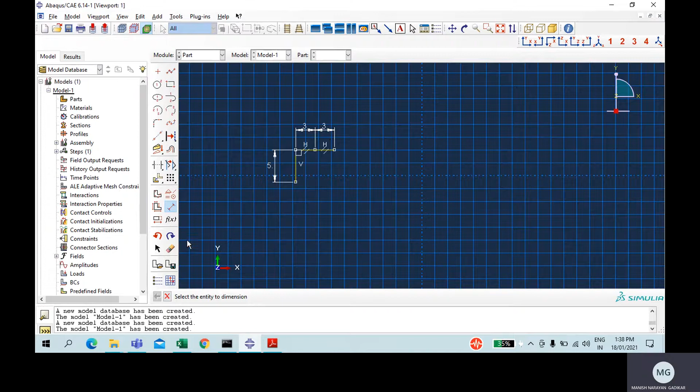This is 5 meter. This is 3 meter, and this is also 3 meter. So close it. Done. Now we have done with the wire element. We'll go for the property. We'll create material property. I can write it as steel here. I have to give general density. We know it, 7850. We have to give some mechanical property, elastic.

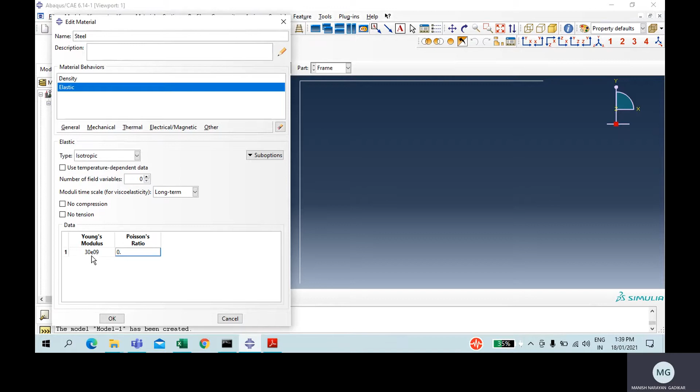We have to see what is Young's modulus in our problem. It's 30 GPa. So 30E09, and Poisson's ratio I'm considering as 0.3 for steel. Okay, now I have to create section. So I'm going with the beam section as the element is wire. I can write it as a beam. Continue. We have to create profile. So I'm selecting rectangular profile. Continue. I have to provide width and depth.

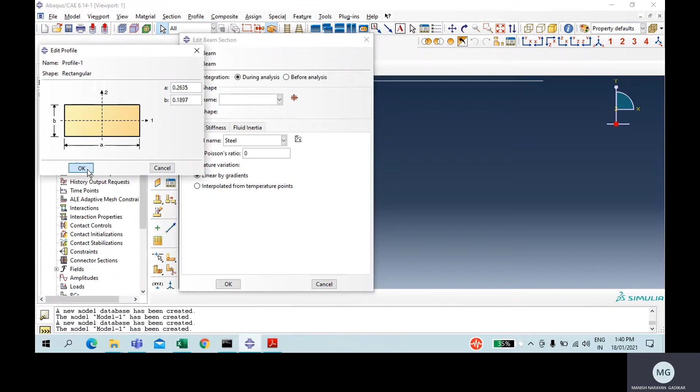So I've calculated these dimensions. It's coming width as 0.2635, and depth is 0.1897. Okay, we have done with the sections. Steel has already come. Now we have to assign the section to this element. We'll be selecting all 3 elements. Done. This beam has already come. Okay, assigning is done. I'll go for assembly.

We'll create instances. We'll create independent mesh instances. Okay, now we'll go for step. We'll create step as a dynamic explicit. Continue. Okay, and I'll go for loading. So firstly, I'm going for boundary conditions. So our boundary condition is fixed here and fixed here. So I'll be selecting this symmetry. I'll write it as fixed.

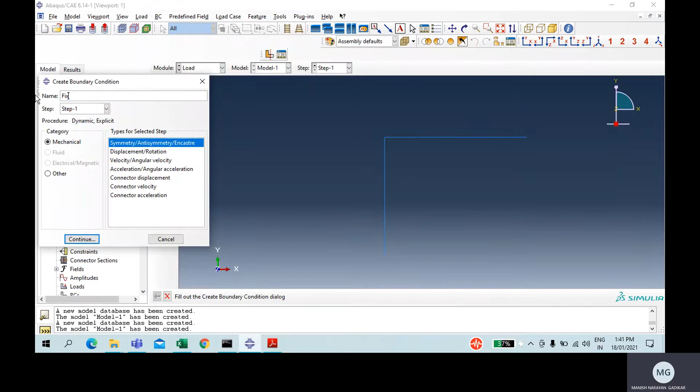Done. I'll select this node. We can select 2 nodes by using the shift button. Both are fixed. Done. We'll encastre it. Okay. Fixing is done. Now I have to go for the loading. UDL of 25 kN per meter in this direction. So I'll go for load. I'll apply line load. I'll select line load. Continue. I'll select this element. Done.

I have to apply it in this direction, in positive X direction. So its value is 25, so 25000 in terms of Newton. We have to apply it smoothly. So I'll go for smooth step. At 0 it is 0 and at 1 it is 1. Okay. We have to change it to amplitude. So line load is done.

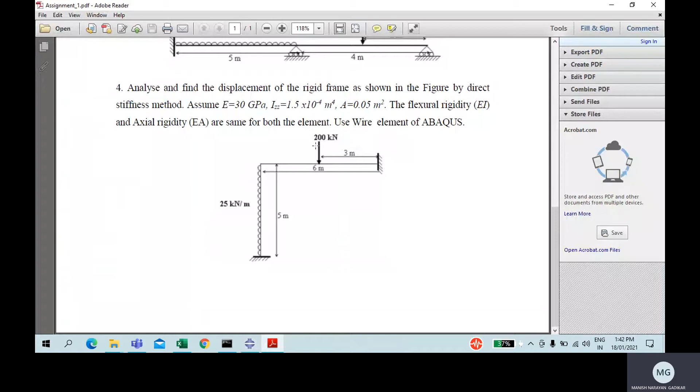Now I'll be going for this point load of 200 kilonewton. So I'll go for load again. I'll select concentrated load. To select this node. Done. So our magnitude is 200 kilonewton, in the minus y direction. So I'm giving minus 200 kilonewton. In terms of Newton, it will be 200000, with amplitude. Okay, so loading is done.

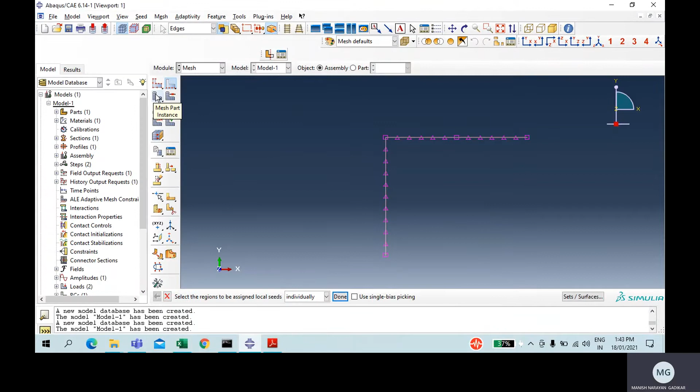Now I'll go for meshing. I'll select whole model. I'll seed it. I'm going with the 0.5 size. Okay. We have seeded. Now we have to go for mesh part instances. Okay. Meshing is done. Now I'll be going for job. I'll create a job for frame element. Okay. We'll submit it.

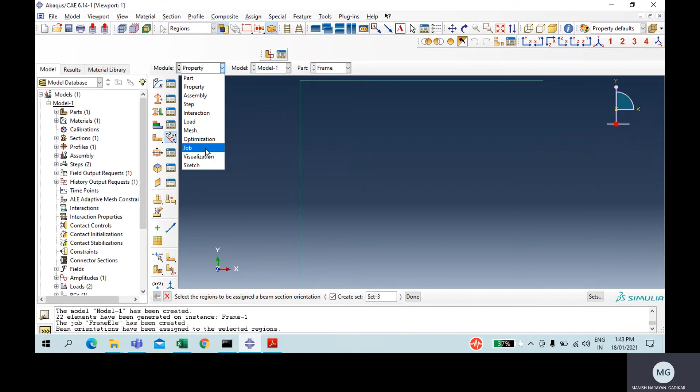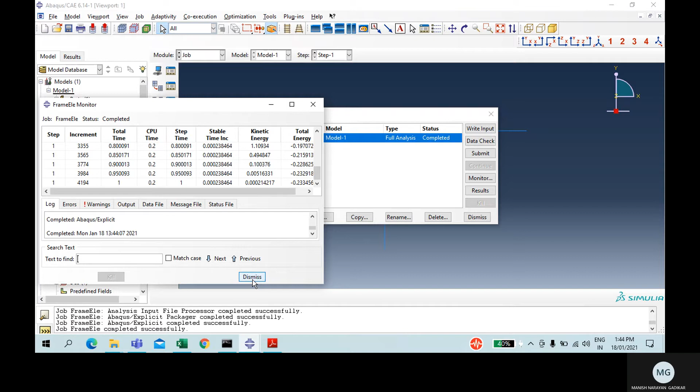We have to orientate it. I forgot to orientate it. So I have to give orientation. Beam section orientation. Done. Orientation is done. I will run that job. Submit. Have to wait. It's completed. Dismiss. We can check results.

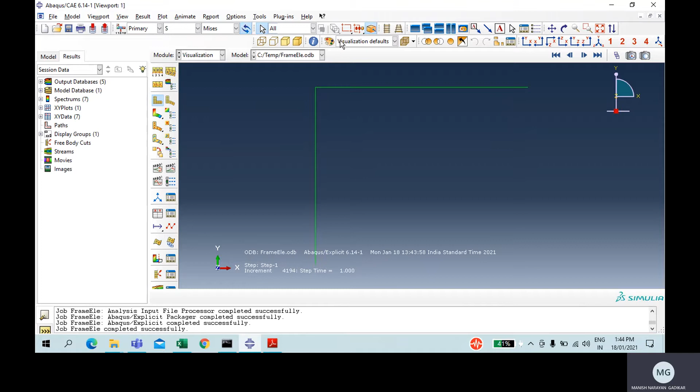So we can check the reactions and moment at this support, at this support, and we can check deflection here also: rotation, axial and vertical deflections. So I'll be showing everything. We can check by query information by selecting probe values. So I will go with the reactions first. RF. Axial reaction will be RF1.

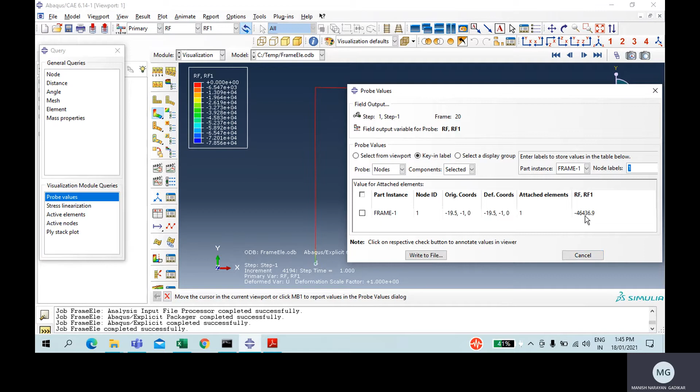So this is my first node. So I'll select node here. I know the node number, so I'll keep here key in label, node label 1. This is our first node. So I'll write node 1 here. It's coming 46436.9, and I'm getting analytically 46590. So it's almost the same.

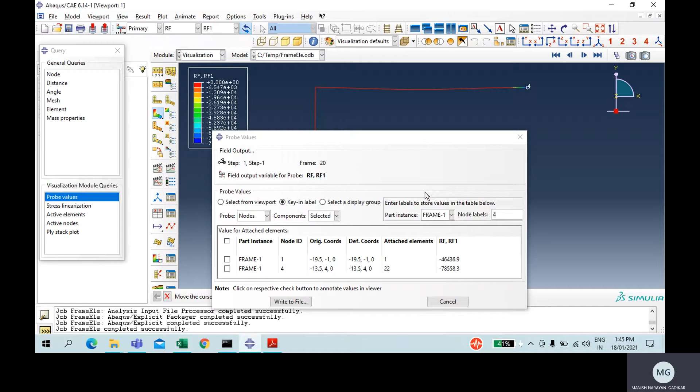Now I'll check for node number 4. This one is coming 78558 and the analytical value is 78400. It's the same. Now we'll check for vertical, RF2, in node 4. On node 4 it's coming 111774 and analytically I'm getting 111200. And for node 1 it's coming 88305 and analytically I'm getting 88800.

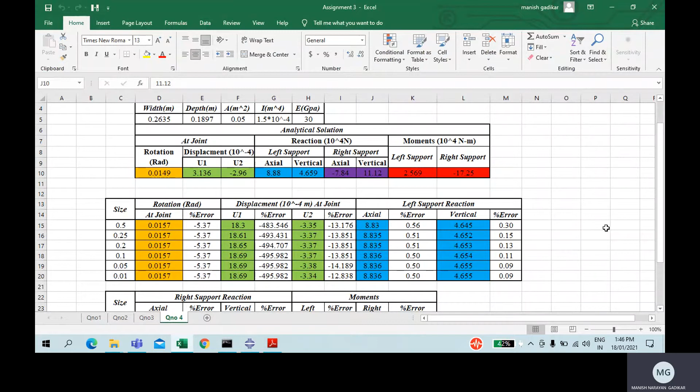Now we'll check moment. Reactions are matching. I'll check for moments, RM3. Moment will be generated at 1 and 4. So for the first, moment is coming 25493.8, and analytically 25690. It's matching. Node 4: it's coming 176050 and I'm getting 172500. So we can go for convergence study and it will come close to the analytical value. I've done the convergence study like this, till the 0.01 mesh.

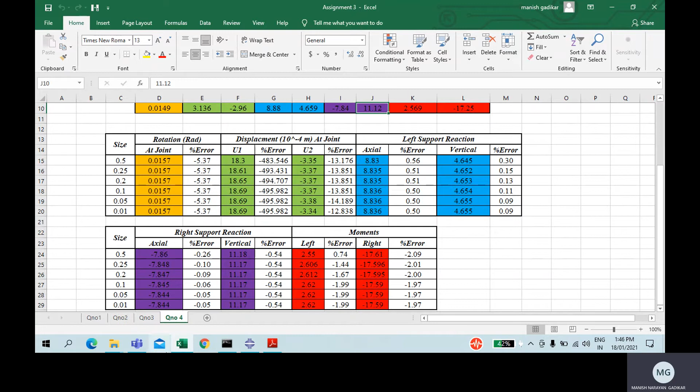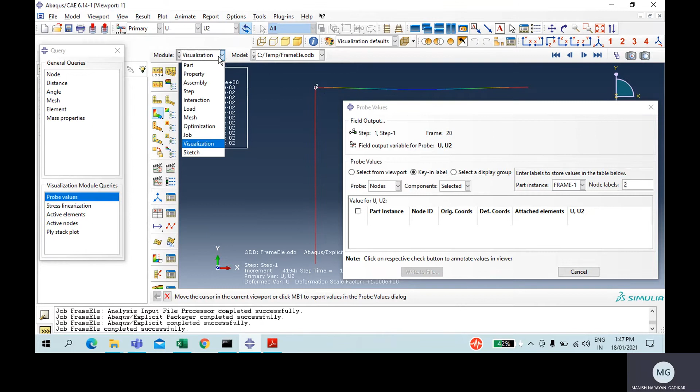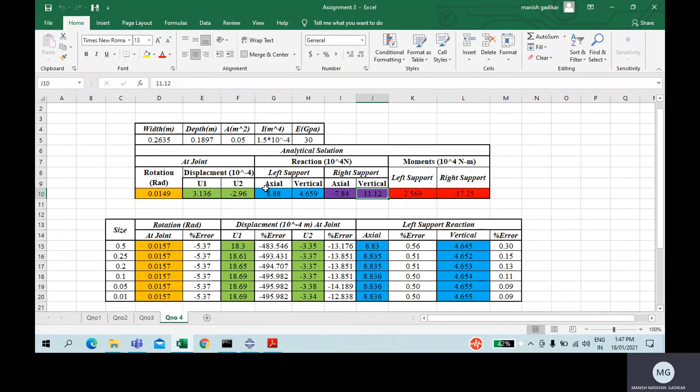We'll check deflections also. We'll check rotation first. Rotation will be generated here at node number 2. So I'll write node number 2 here. It's coming 0.015 and analytically I'm getting 0.0149. So it's also matching. I'll go with U2. U2 is coming 3.3 × 10^-4 and analytically I'm getting 2.96 × 10^-4. So it's also similar.

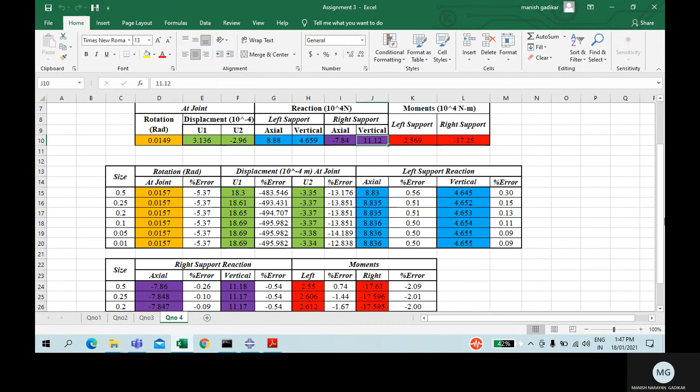U1: U1 is coming 1.8 × 10^-3 and analytically I am getting 3.136 × 10^-4. So I have done this frame.

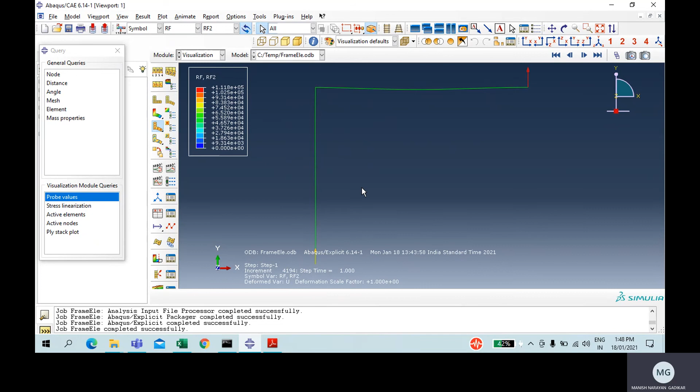We can check with the symbols also. See, this is U1, U2, and reactions we can check. It's coming like this. Resultant RF1 is axial force for this, and in local coordinates it will be vertical for this element. RF2 will be axial for this element and vertical for this element.